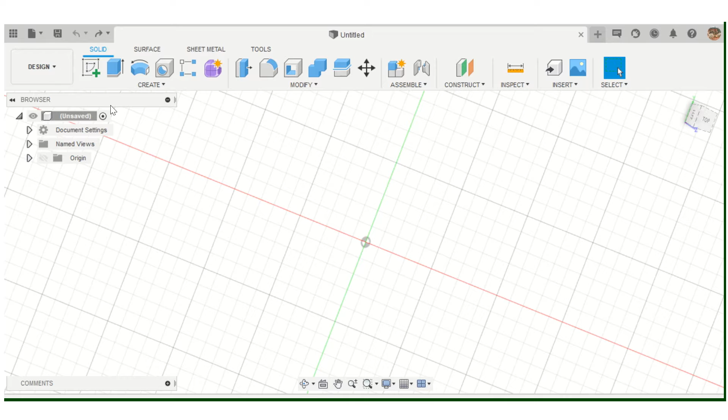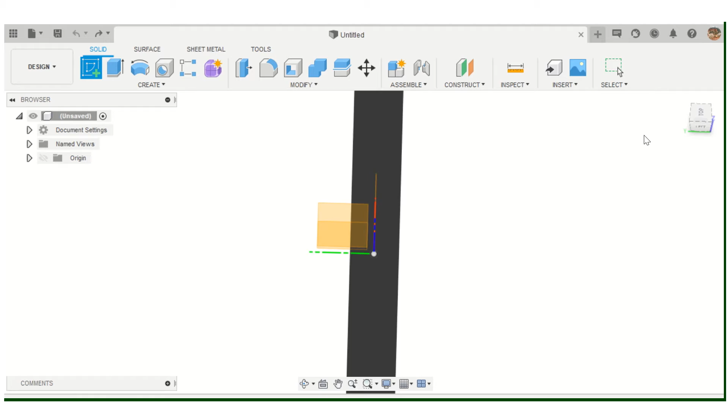When you get to the interference test, ideally you're supposed to do it on a model you created of an assembly from an earlier project, differently from how the curriculum has it done. So what I'm going to have you do is create your own assembly. To do that, the directions say to make a 2 by 3 by 4 inch prism, and I'm not seeing that exactly the way I want to see it - I'm looking at this from a super weird viewpoint.

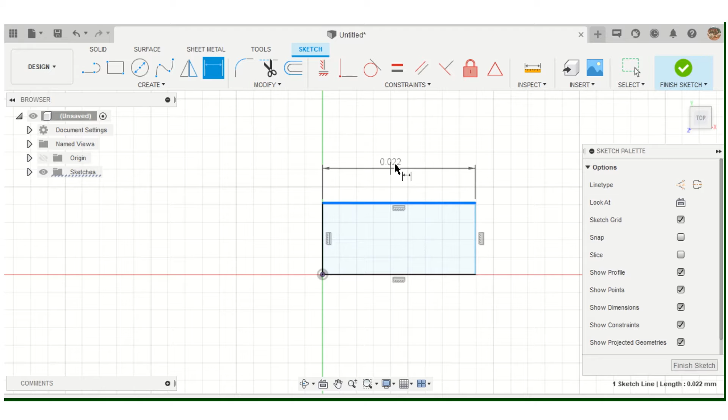I want that plane - there we go. Okay, that was really weird. So to do a 2 by 3 by 4 inch prism, I'm just going to dimension these at 2 inches, and this will be 3 inches, and finish the sketch. Good heavens, there we go. And then we'll extrude it up by 4 inches.

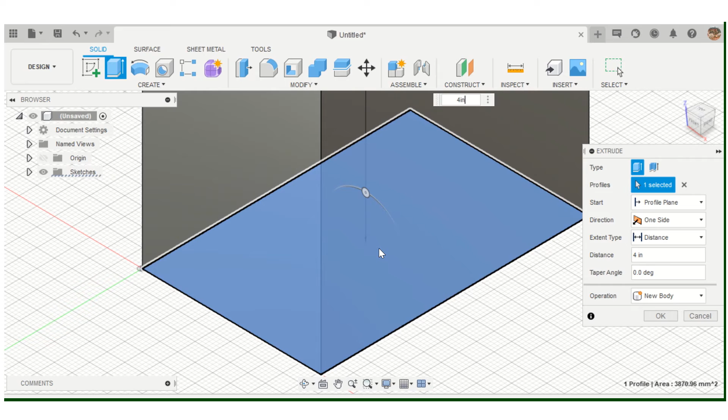You don't have to do it exactly that way, but you can do like a 2 by 4 by 3 as long as it's this shape prism. Okay, and then we're going to put a 1 inch diameter hole in it.

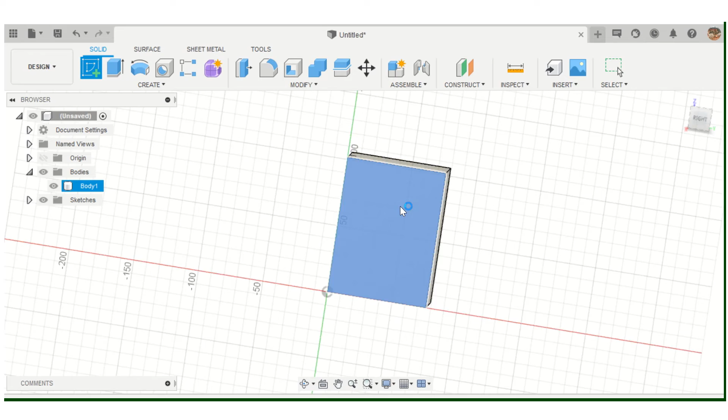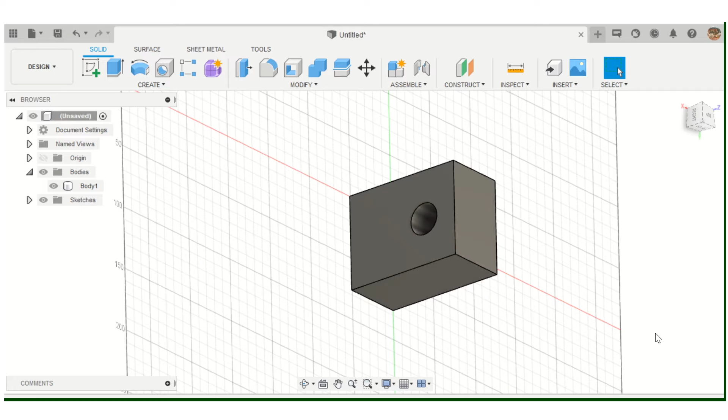It doesn't matter which face you pick or where you put the hole. So I'll draw the hole on that face and make it 1 inch. Of course, the assumption is that you're able to do that, and then we'll do an extrude cut through that. Your hole can really be anywhere in that prism - basically you just need an object with a hole in it.

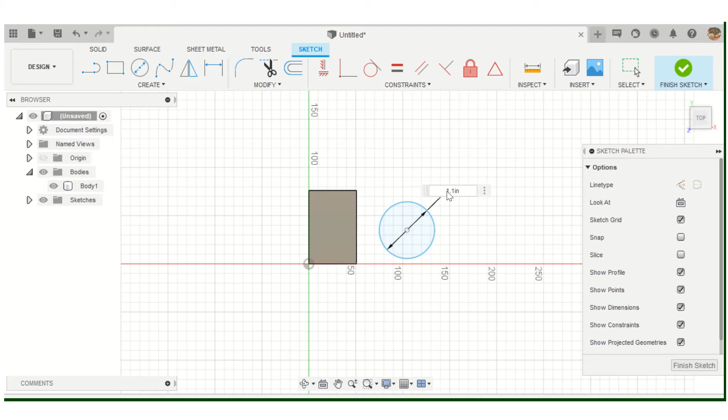Now I'm going to start a new sketch in the same design, but I'd like to have one of the other planes chosen. For this, we're going to do a cylinder, but we're going to make the diameter of the cylinder too big for the hole. So the hole has a diameter of 1 inch, and we're going to pick 1.1 inches for our cylinder, and then we'll extrude that, just to give us a cylinder.

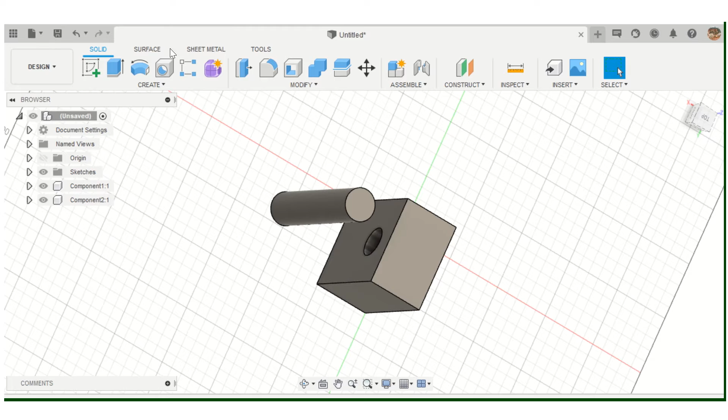Now we need to turn each of these bodies into components so that we're able to move them around. So we'll right click on the bodies and turn them into components, and we will ground the prism. So I should be able to move the cylinder around, but not the prism.

Now, the way that I did this, I just kind of grabbed - well, let's do the properties analysis. I want you to pick one component or body from your design. If your design was just a single body design, you didn't have to join anything together, then you're going to pick body. If your design had multiple components, then you're going to pick component.

You're going to right click on it and choose physical material. Then from the list, you are not going to pick glass - you're going to come down to metal and scroll down until you get to brass. Oh, there's brass, okay. And then what you do is click and drag it onto the component or body that you want to be brass.

Then go back and right click on it again and choose properties. We have done this before, and I want you to write down the density, the mass, and the volume. Now, I was not paying much attention to much of anything here, so I want you to write down the density, the mass, and the volume for that particular physical material on your sheet. Then click OK.

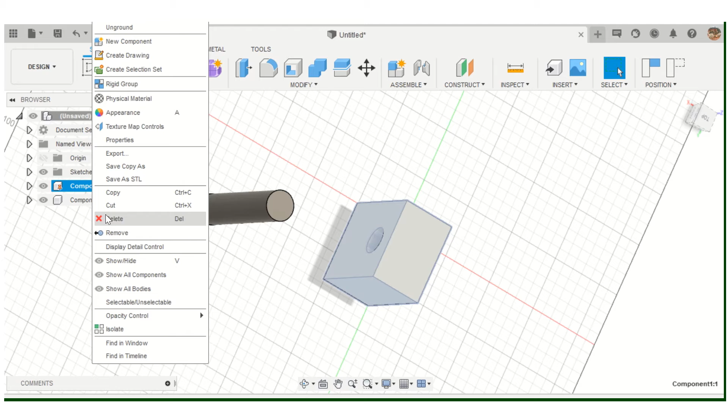And then go back over here to physical material. Again, I want you to right click on the brass, unassign and delete it, and then change it to glass. Repeat that process with it as glass.

Okay, now I'm going to go ahead and unassign that because I'm not going to take you guys through that. The third part was to pick the ideal material for whatever your design is. So if you did a phone case, probably the 3D printed plastic was not ideal.

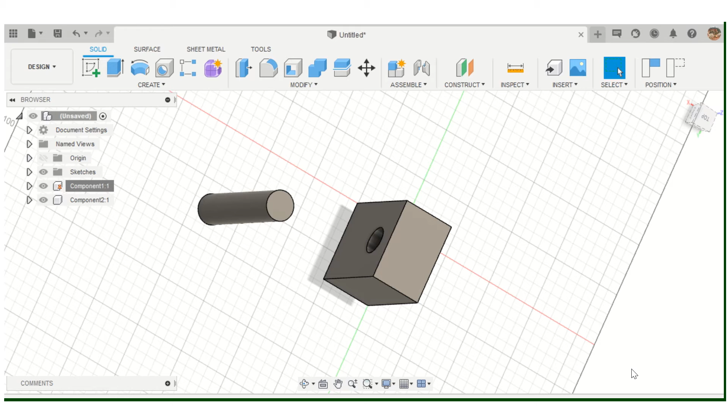And then run the materials analysis again on your ideal material. Now for this, I have to move and copy this because mine is oriented the wrong way. Okay, so I think that's where I want it oriented. Let me kind of look at it again.

Okay, yeah, mine was oriented the wrong way, so I want to move that. You can kind of move it to about where you want that joint to be. The closer you can line it up, the easier the joint is going to be.

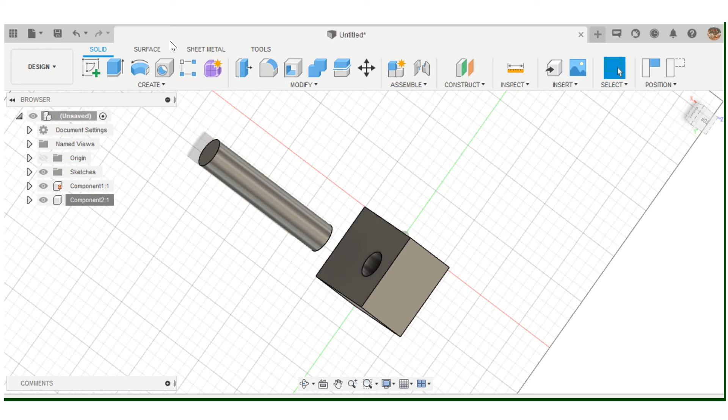And now we'll click in the assemble and we're going to do a joint. We want to capture the position, otherwise it's going to return my cylinder to that wrong orientation.

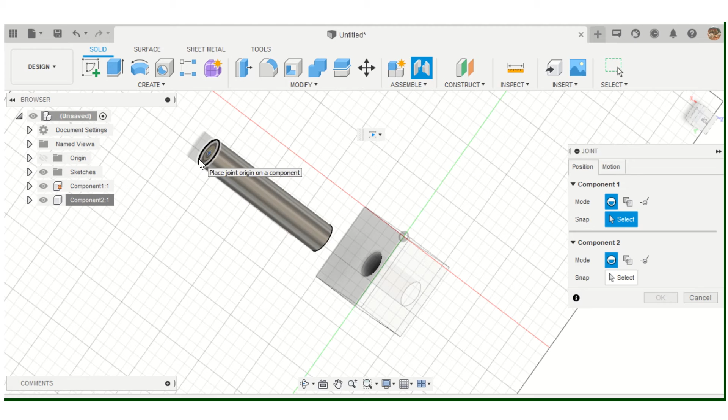And then in your joint menu, I want you to pick a slider joint. So when I go to pick the first object, I'll pick the cylinder. You can see where I'm sliding it here - that's called your joint origin, and that just tells the computer where it's going to slide into.

And then I will pick my second object and I would like it to slide into the joint. It's going to go ahead and slide it into the joint and give me that preview of what that looks like. Now, because it's grounded, I should be able to move it back and forth.

Now remember, though, that we intentionally made the diameter of that cylinder bigger than the diameter of the hole. So Fusion is not registering that it shouldn't fit into that hole, and if you try to build this in real life, it wouldn't work. So what we're going to do is run an interference test, because while we intentionally did that, sometimes there are designs you might do where you don't intentionally have an issue with it, but you do. The interference test is going to figure that out for us.

So we are going to capture that position, and then it asks us to select the two bodies. So we're going to do the cylinder and the prism, including coincident faces - that just means you're going to include the face as part of it. And then you click right here where it says compute.

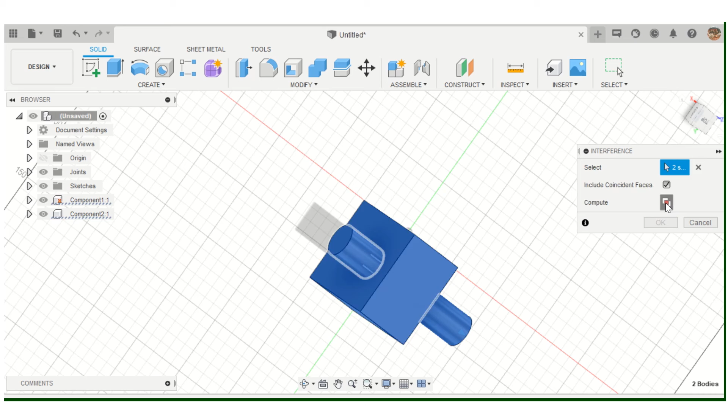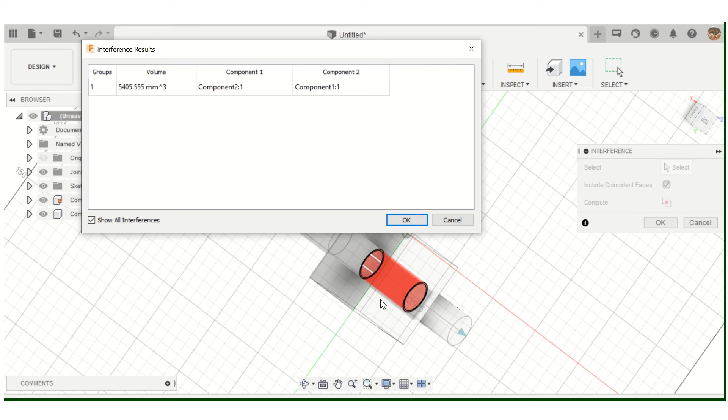And what it tells you is that these are actually overlapping each other. There's an interference there of about 5,405 cubic millimeters. And if I slide that out of the way, it'll actually highlight where those are interfering. That tells you that this design can look great in Fusion, but it's actually not going to look great. So what you guys are going to need to do is run that interference test yourself.

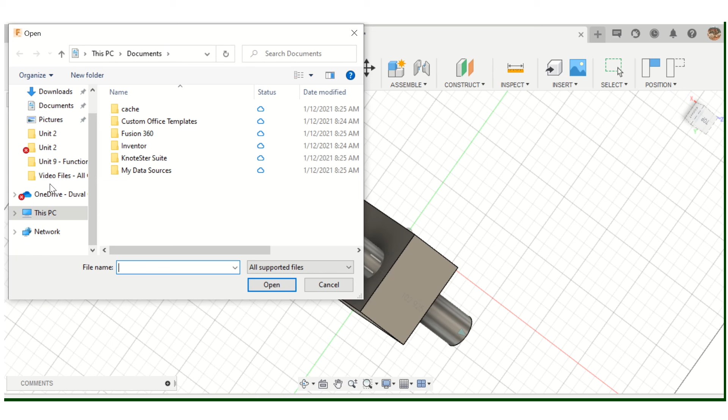I am going to see if it will let me open up - I actually don't know if it's going to let me. I know what I'm looking for. I'm actually looking for a design I did of a picture frame, but I don't think it's going to just let me find what I'm looking for. Design samples... nope.

It's a picture frame I did where I had an assembly where I designed a frame using the sweep feature, which we did when we made the... I don't remember what it was, but I know we did the sweep feature. Oh, it was the water pipe.

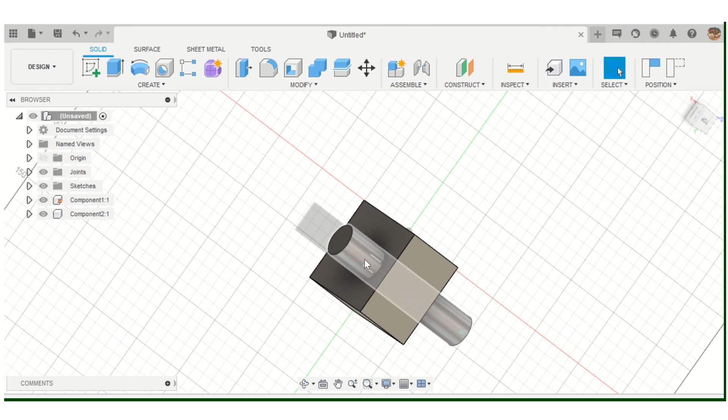And then I had the glass, which was a separate component, and I wanted to put the glass into the frame. And where I was picking my joint origins, which are those things that look like puzzle pieces when you're doing the joints, I was having a really hard time putting the joint origins in the right spot, and so my glass was constantly overlapping with my frame.

And I would run this interference test and it would show that even though the measurements were right for it, it wasn't fitting in the Fusion model - I wasn't getting it in the right spot. And so that's what an interference test can do.

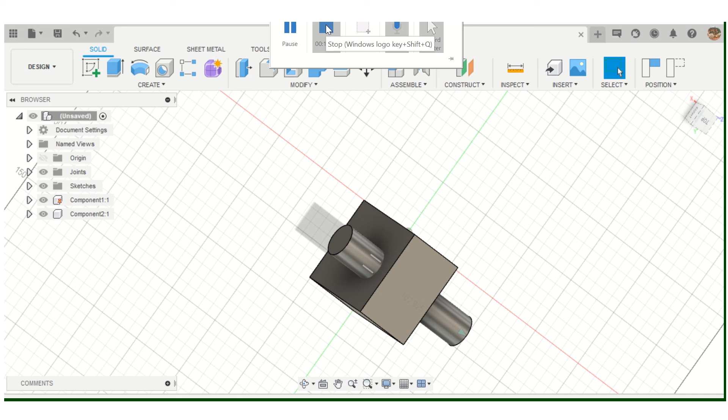So hopefully this video will help anybody who is absent from class keep up with the material and be able to complete the activity on your own.